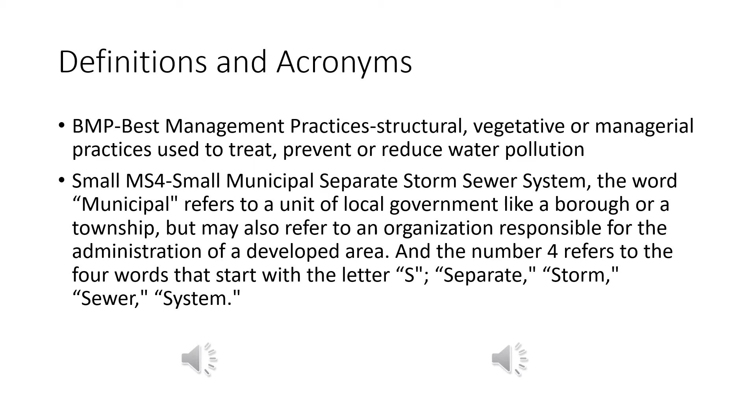SPPP, or Stormwater Pollution Prevention Plan, is the written plan required by the permit that describes how the permittee will implement each permit requirement and provides a place for record keeping and documenting when permit requirements are met.

In addition to stormwater, Atlantic Cape is authorized to discharge the following non-stormwater discharges into and from its MS4: potable water line flushing, uncontaminated groundwater, air conditioning condensate, irrigation water, flows from springs, riparian habitats, etc., sidewalk, driveway, and street wash water, flows from firefighting activities, and flows from clean water rinsing of equipment and vehicles used in the application of salt and de-icing materials.

Prior to rinsing, all equipment and vehicles shall be cleaned using dry methods, and recovered materials are to be returned to storage. Rinsing equipment is limited to exterior, undercarriage, and exposed parts and does not apply to engines or other enclosed machinery. For more specifics about non-stormwater discharges that are allowable under the permit, please refer to the permit.

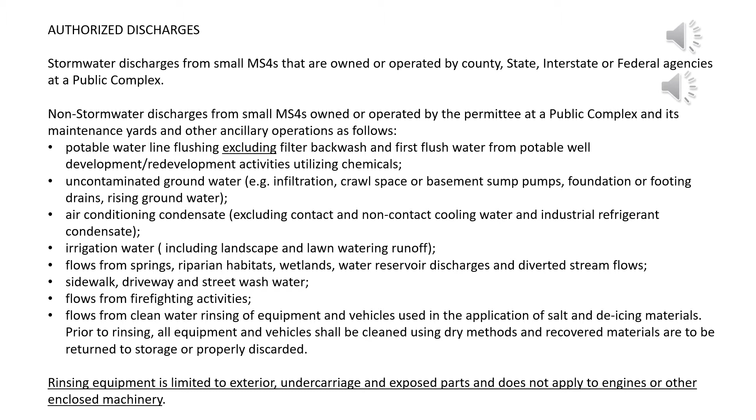Herbicide application management: the permittee shall restrict the application of any herbicide to prevent it from being washed by stormwater into the waters of the state and to prevent erosion caused by devegetation as follows. The permittee shall not apply herbicides on or adjacent to storm drain inlets, on steeply sloping ground, along curb lines, and along unobstructed shoulders, and the permittee shall only apply herbicides within a 2-foot radius around structures where overgrowth presents a safety hazard and where it is unsafe to mow.

Please note, herbicides are defined as pesticides under the New Jersey Pesticide Control Code NJAC 7:30. While the permit allows for the use of herbicides with the conditions stated above, it is not an authorization circumventing NJAC 7:30. Any pesticide application must also comply with the code.

Permittees are required to develop a stormwater management program to implement BMPs and other measures to reduce the discharge of pollutants from MS4s, maintenance yards, and other ancillary operations to the maximum extent practicable. They must also develop, update, implement, and maintain a written SPPP.

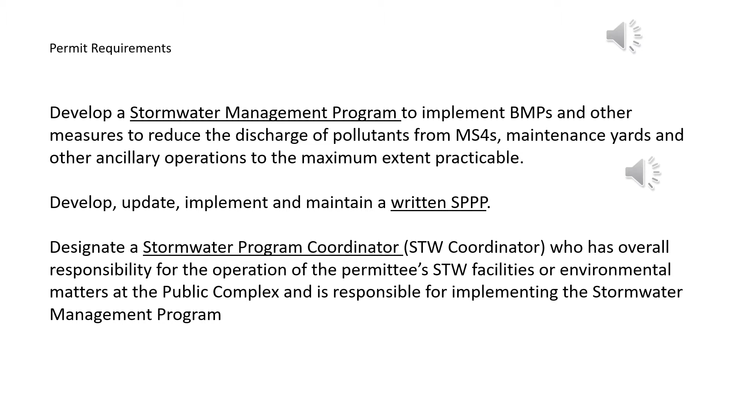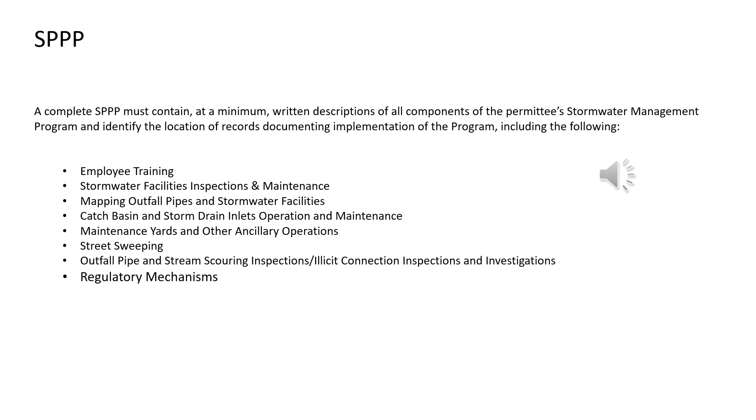The SPPP must contain written descriptions of all components of the stormwater management program. What we will be discussing specifically in our employee training are stormwater facilities inspection and maintenance, mapping outfall pipes and stormwater facilities, catch basin and storm drain inlet operation and maintenance, maintenance yards and other ancillary operations, street sweeping, outfall pipe and stream scouring inspections, and illicit connection inspections and investigations, and regulatory mechanisms.

Atlantic Cape's stormwater facilities consist of multiple catch basins and conveyances, 5 mapped outfalls, 5 infiltration, detention, and retention basins, 3 biobasins, and 2 green roofs.

A catch basin is a box that's set into the ground below grade at a low point in a property with a grate on the top and a drainage pipe that slopes away from the basin. Catch basins help maintain proper drainage and catch debris, which prevents pipes downstream from becoming clogged.

An outfall is the discharge point of a waste stream into a body of water. Detention basins temporarily store stormwater runoff. They have an outlet and are designed to manage stormwater runoff by storing it and releasing it gradually until it's drained. The permit requires that the basin drain within 72 hours.

Infiltration basins, also known as recharge basins, are designed to infiltrate stormwater through permeable soils into the groundwater aquifer. They typically do not have an outlet, do not release water except by infiltration, and should drain within 72 hours. Retention basins, by contrast, are designed to permanently hold water.

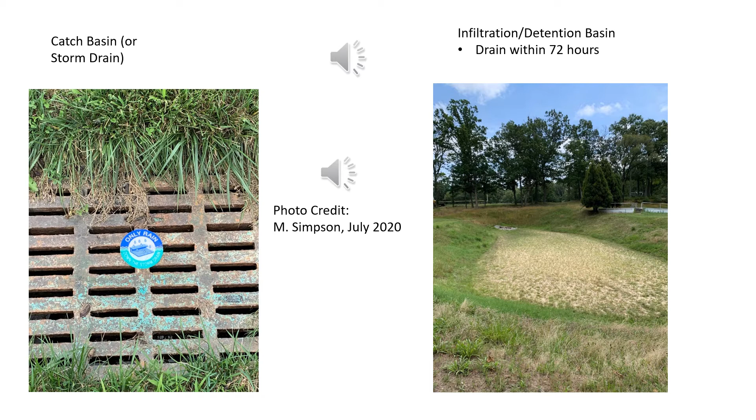This is the infiltration or detention basin by the Rutgers building at the Mays Landing campus. It's designed to drain within 72 hours. Remember, detention, dry. The basin should be dry most of the time unless it's raining.

This is the retention basin over by M building. It's designed to retain water and mimic a natural pond. It only discharges during very extreme conditions. Many times you can find frogs and turtles in these retention basins, sometimes even fish.

These are the biobasins located between the STEM building and the library. They're designed to infiltrate and recharge the aquifer. Biobasins are considered green infrastructure.

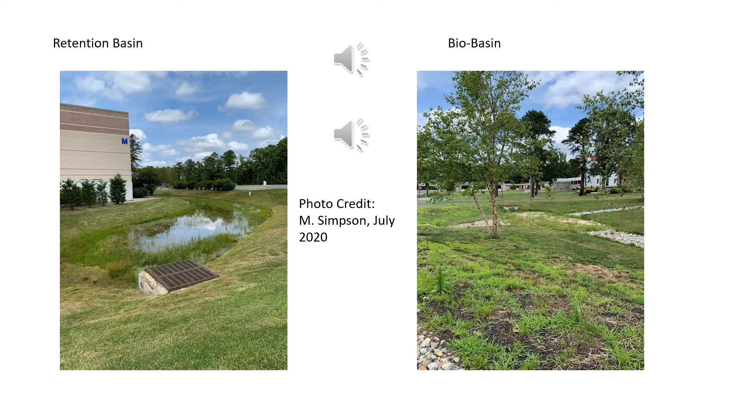We're now going to watch a video developed by NJDEP on stormwater facilities inspection and maintenance procedures.

This stormwater management training is a continuation of the material covered in Part 1. This training provides a holistic view of the maintenance work that ensures the stormwater BMPs function well. This part of the training covers 3 topics. The first, maintenance of stormwater BMPs, provides the elements of maintenance and the tools to assure the maintenance is properly performed. The second gives an example of using a checklist to inspect a BMP. The final topic provides several examples of commonly occurring maintenance issues.

Now let's talk about the maintenance work. As previously mentioned, the purpose of maintenance work is to ensure the stormwater BMPs function as designed. For example, the inlet of a basin must be clear of obstacles such as vegetation, trash, and sediment so that the runoff can freely flow into the basin and get treated.

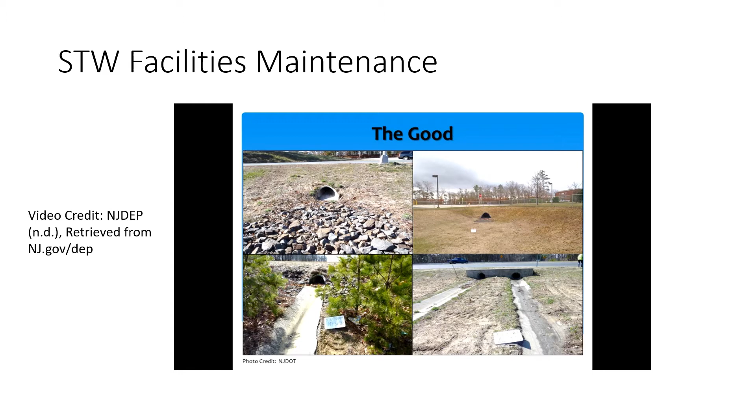These are some examples of good maintenance on the inlets of NJDOT's stormwater basins. However, it's not always sunny here in New Jersey. It has to rain sometime. Here are a few examples of inlets in bad condition. These can be easily fixed by clearing the sediment, the trash, and vegetation.

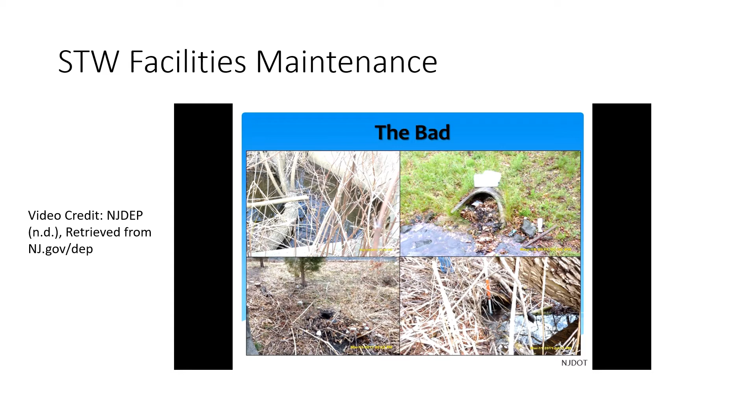However, the quick fix will not always be the best way to keep these bad conditions from reoccurring. We need a long-term, consistent way to prevent these bad situations. So, what is the best way to fix a bad situation? The fix is best remembered as MIAMI.

This acronym stands for Maintenance Plan, Inspection, Actions, Preventive Action and Corrective Action, Maintaining Records, and it is an iteration that you have to evaluate annually for the effectiveness of the maintenance plan. MIAMI is required by the stormwater management rules, under which all major development is required to have a maintenance plan for stormwater BMPs. The next slides will explain MIAMI.

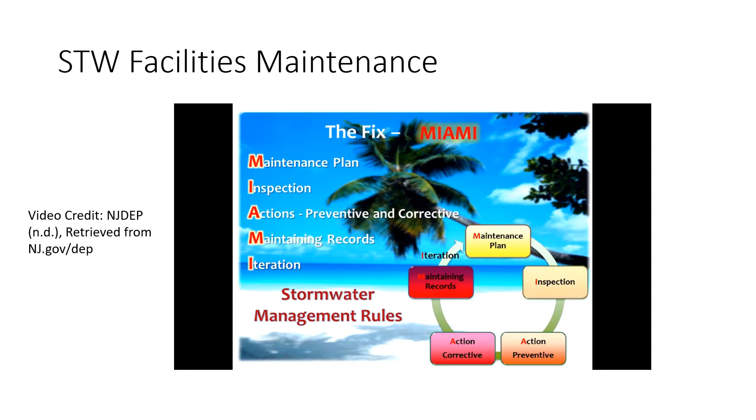The first M of MIAMI stands for Maintenance Plan. The stormwater management rules at NJAC 7:8, subchapter 5.8, and so forth, spell out the components of a maintenance plan. It is basically a planning and tracking tool containing subplans, including inventory of the stormwater BMPs, information about the stormwater BMPs, planning of preventive and corrective maintenance actions, planning of the logistics, planning of the disposal methods, planning of the costs, and education of staff for training on safety procedures and maintenance work. It can be basically grouped into 3 areas: information, planning, and education.

To make it easy to remember, you can think of it as PIE. Basically, making a maintenance plan is as easy as making a pie. First, the maintenance plan needs to have an inventory of all BMPs, including the type of BMPs, sand filter, wet pond, their location, located by GPS references or state plane coordinates, and their outfalls. Second, the maintenance plan needs to provide detailed information of each BMP present.

The detailed information includes their design information, such as the depth of the basin, the depth of the pond, the number of inlets, the size of the outlet orifices, the design detention time, the drain time, the material comprising the basin bottom, whether vegetation is required, etc.

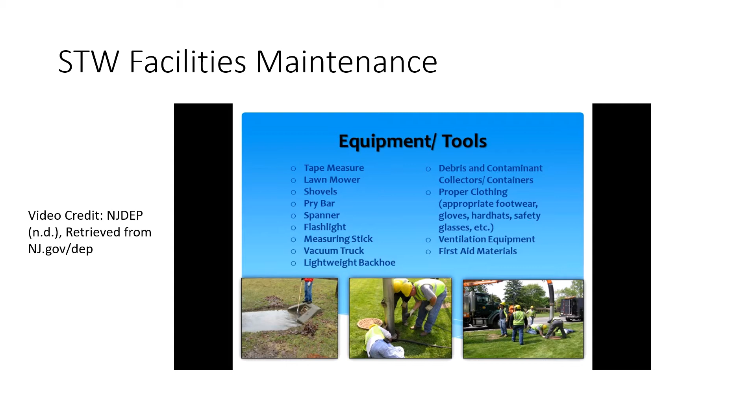Also, why do we need a lightweight backhoe? As previously mentioned, soil compaction must be avoided in infiltration basins. Therefore, when you replace sand or regrade the soil of the infiltration basin, you must use a lightweight backhoe to do the work. A maintenance plan also needs to include the disposal method and the cost.

The disposal method has to consider how to transport the removed vegetation and sediment to the disposal site. Measures may be necessary to prevent leakage of wet sediment during transport, and the site may be municipal or privately operated, or in some cases involve on-site disposal. Since permits are often required for disposal at these facilities, it is essential to plan ahead for the costs, the time, and the tasks associated with obtaining these permits.

After planning the tasks and subjects mentioned above, you will have an estimate of the costs involved, which are always required for budgeting purposes and for compliance with the stormwater management rule.

A maintenance plan shall also include a plan to educate and train staff regarding safety procedures and measures, especially the safety procedures for confined space entry. The maintenance plan shall also set up a training schedule for maintenance staff on the stormwater BMPs, maintenance work, use of tools, operation of equipment, and record keeping of performed tasks.

To recap the maintenance plan, what components are required? Basically, making a maintenance plan is as easy as remembering the word PIE, which is short for planning, information, and education. The planning part of a maintenance plan includes planning of preventive and corrective maintenance actions, planning of the logistics, planning of the disposal method, planning of the costs.

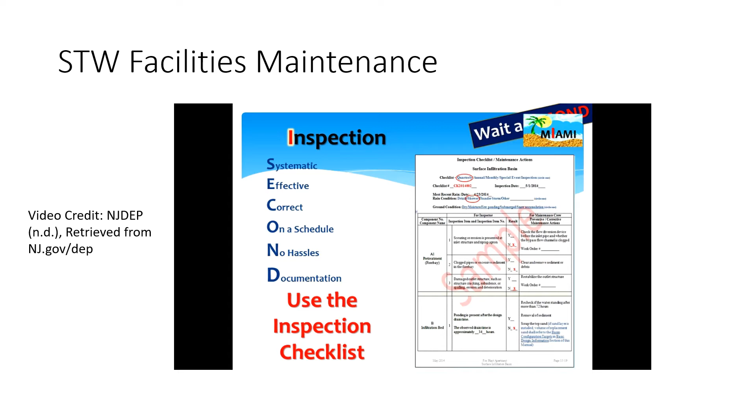After the inspection, what is the next part of maintenance? The actions. They include preventive maintenance tasks and corrective maintenance tasks. Preventive action is geared towards housekeeping done on a regular basis. The corrective actions are more likely to occur incidentally in response to the problems discovered during the inspection.

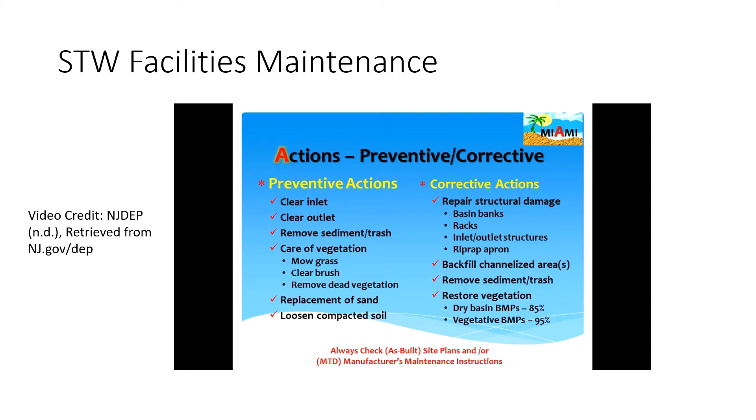Here is a list of preventive actions and also of corrective actions. It is by no means a full list. The actions could be more depending on the type of BMPs and the variation of the design. For example, the sand layer of a sand filter or infiltration basin needs to be replaced at least once every 2 years. However, if these BMPs are located in an area of having high solids loading, the designer of the BMP may request a more frequent replacement of sand.

The next part of maintenance work is to maintain good records of the inspection, the preventive actions, and the corrective actions taken to date. Keeping those records are also required by the stormwater management rules. Practically speaking, it is good to keep those records for tracking down whether or not the issues have been resolved, finding a trend, or tracking how an issue evolved, and providing as evidence the work was actually performed.

The maintenance records serve as a searchable archive of the inspections and the resulting work orders for preventive actions and repairs. Finally, the maintenance work is an ongoing, evolving process.

The stormwater management rules require that the effectiveness of the maintenance plan be evaluated annually. The maintenance plan must be adjusted according to the resulting evaluation. Maintenance personnel shall provide comments and suggestions to the manager for consideration on how to perform the work more effectively in the future. The manager shall also review the inspections and preventive and corrective records to find whether an improvement can be made.

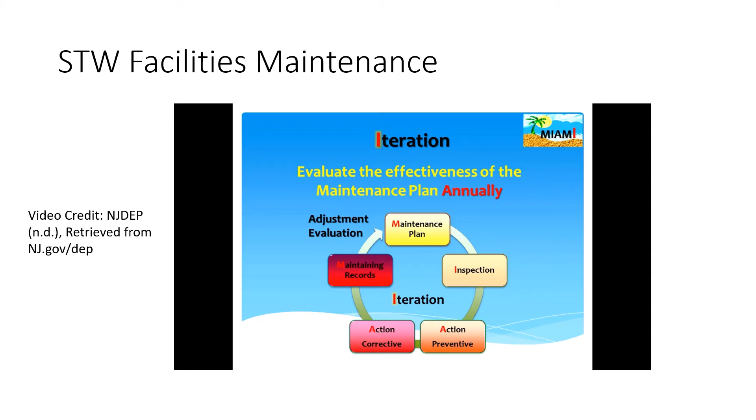Up until now, we have talked about the need for a maintenance plan to lay out the maintenance tasks. We also talked about the inspections, the preventive actions and corrective actions, and the maintenance of records. One may wonder who has to prepare the maintenance plan, who performs the inspection, and who keeps the records. So let's talk about roles and responsibilities.

Under the stormwater management rules, it is the design engineer's responsibility to prepare the maintenance plan, because he or she is the one who best understands the requirements of the BMP design. The design engineer also has the most knowledge of all of the site conditions specific to that BMP, such as the water table, the soil, and the drainage area, etc.

However, if the design engineer did not properly prepare the maintenance plan, or if the maintenance plan has been lost, the responsibility to prepare the maintenance plan may fall on the responsible party, who is typically the operator or the owner of the facility. Often a permittee will be the responsible party unless it is assigned to others.

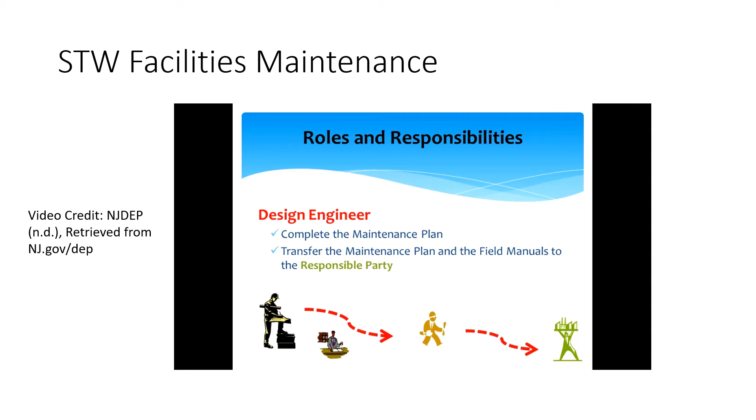The day-to-day performance of the maintenance task falls on the maintenance managers and the maintenance crew, with each having various responsibilities. For the inspector, it is a role that can be performed by people inside the responsible party. But sometimes the inspector may be from a local authority, such as township inspectors, or from state agencies like the DEP.

It is a template that the design engineer or the maintenance manager can change to meet the needs of their stormwater BMPs. The maintenance crew can take one field manual to do an inspection and record maintenance work every time they go out. They can read the information about the specific stormwater BMP they are going to inspect or work on.

They can record the inspection findings, maintenance work, or repair work performed on the checklist and keep the maintenance record in the field manual. After coming back to the office, they can hand over the field manual to the manager, who can then track down the issues and keep the inspection checklist and maintenance records in the file.

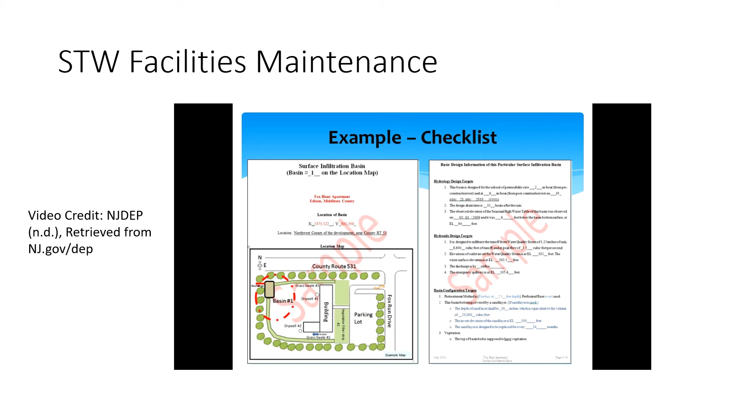Then there is the checklist for inspection. On the checklist, the inspector may record site information such as the weather, the ground condition, wet, dry, ponding present. Then the checklist includes inspection items grouped by the major component of the BMP, such as the inlet, the basin bed, the embankment, the outlet, and vegetation, etc.

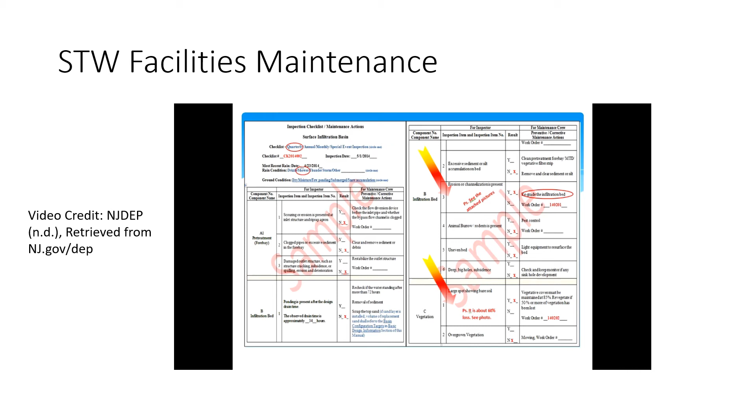It also has instructions of what conditions are determined to be normal, and the space to make comments and assign work orders for corrective actions. Then the inspector can sign off on the inspection form and include a date.

The field manual also contains the preventive maintenance record and the corrective maintenance record. The maintenance personnel can record the work performed and any issues to be followed up on. Now let's see some photos of some common maintenance issues and how to correct them.

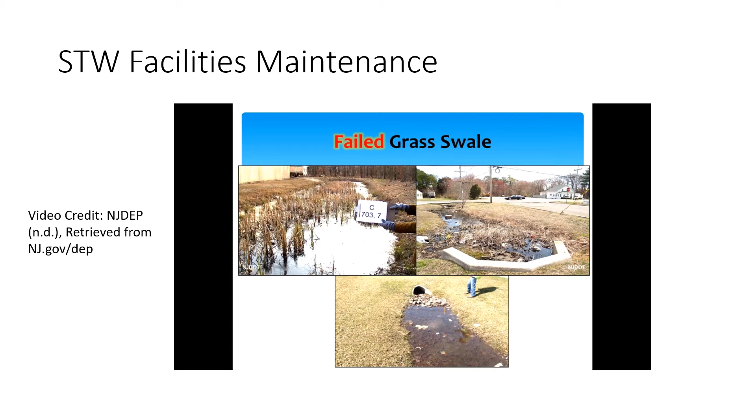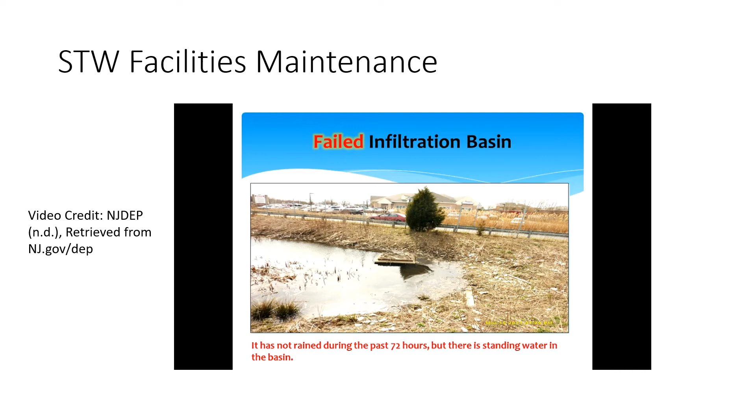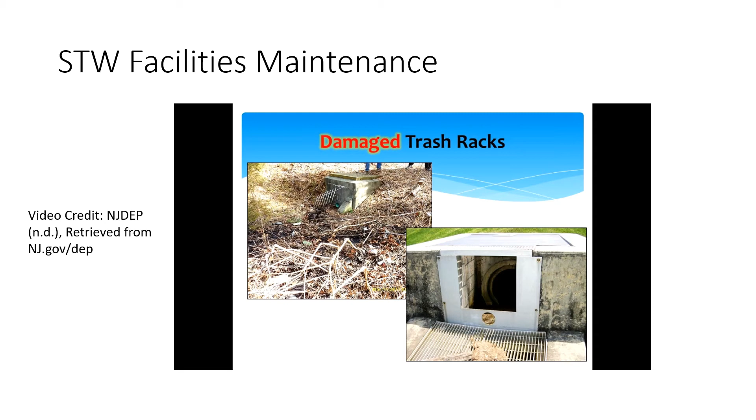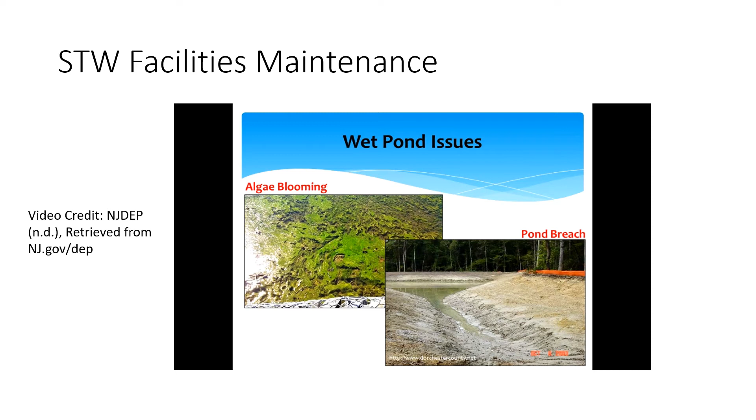Let's summarize the presentation regarding maintenance of stormwater BMPs. In Part 1, we talked about the reasons we need stormwater management and the basic functions and types of stormwater BMPs. For the basic functions, they include pollution control, flood control, and erosion control. Also included is groundwater recharge.

The types of stormwater BMPs, which we've categorized for the purpose of maintenance, include the dry basin type, the wet basin type, the vegetative type, and MTDs, which are manufactured treatment devices. In Part 2, we then talked about the required maintenance of stormwater BMPs. The Miami solution, which is the maintenance plan, inspection, action, both preventive and corrective, the maintenance of records, and the iteration of the maintenance work.

For creating a maintenance plan, it is as easy as making a pie: information about the BMPs, planning of the maintenance work, and education of the personnel.

We also gave an example of a checklist, which addressed maintenance records and the items that one would have to record about a particular BMP during a site visit. Finally, we talked about some maintenance issues and how to fix them. Thank you very much for your attention.

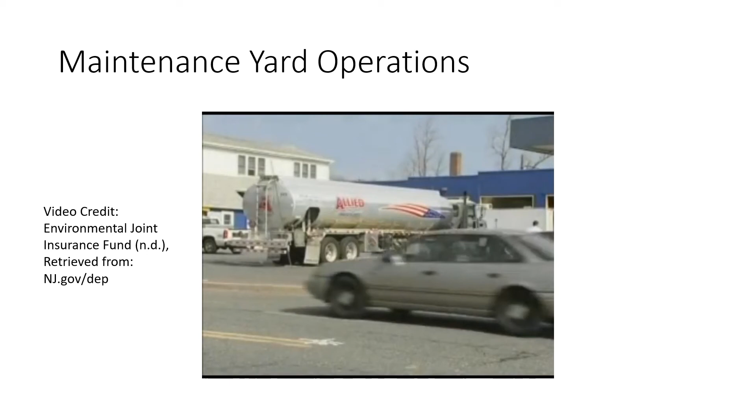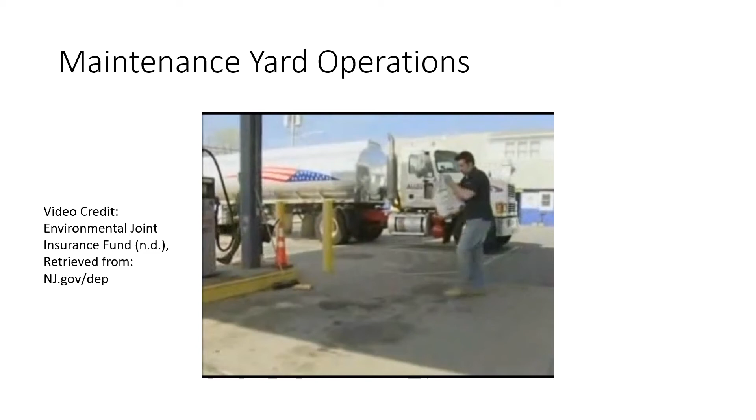Maintenance yard operations. Many of the day-to-day operations at municipal maintenance yards can contribute to stormwater pollution when these operations are not managed properly. The permit requirements for maintenance yard operations are aimed directly at the municipal public works yard and their ancillary operations. Best management practices have been designed to help improve the quality of stormwater leaving the maintenance yard. Where and how vehicle maintenance is performed, maintenance materials are stored, and motor fuels are handled can all directly impact the quality of stormwater leaving these sites and entering our water bodies.

Municipalities are required to implement standard operating procedures for the following activities: vehicle and equipment fueling and bulk deliveries, vehicle maintenance, good housekeeping, fueling operations.

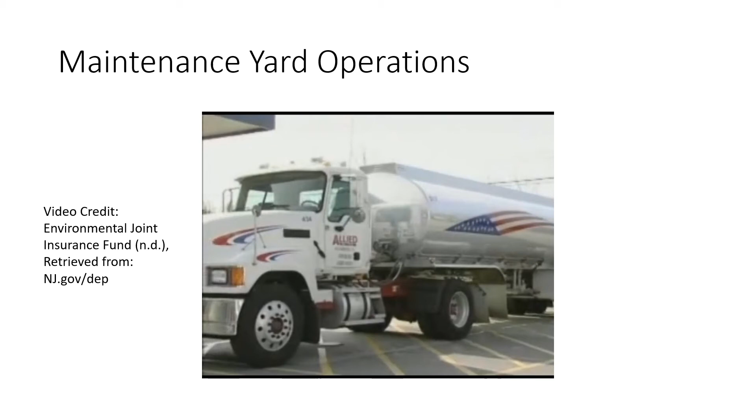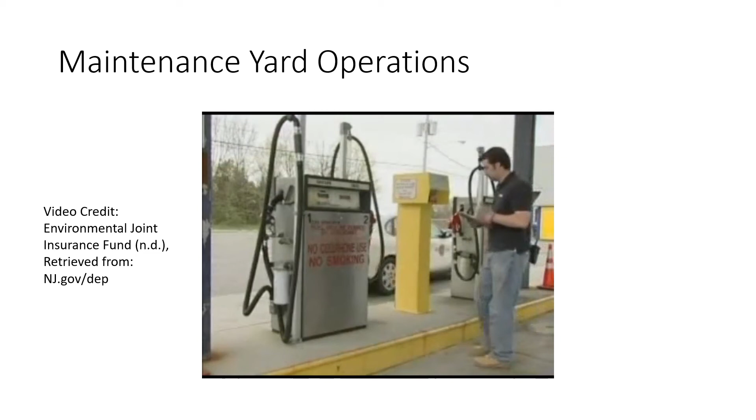Tier A municipalities are required to implement a standard operating procedure for all vehicle and equipment fueling as well as bulk fuel deliveries. All maintenance yards and ancillary operations which have gasoline, diesel, heating oil, or waste oil are applicable to this requirement. The maintenance yard and supporting facilities must be inspected regularly to ensure compliance with the municipality's fueling operations standard operating procedure. Remember to document your inspections.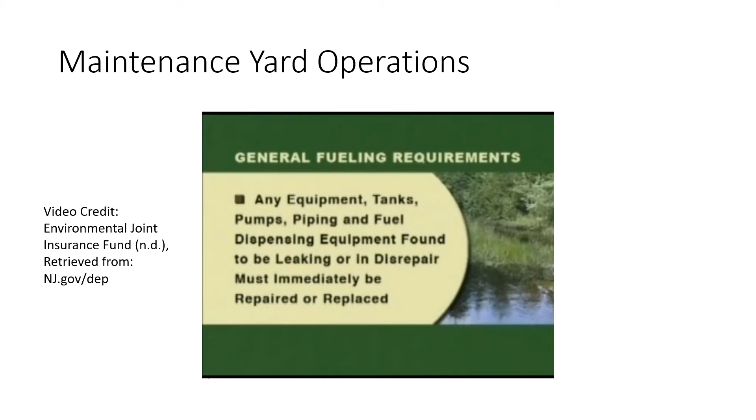General fueling requirements include no topping off vehicles, mobile fuel tanks, and storage tanks. Perform regular inspections and maintenance on all fueling equipment. Clearly post in a prominent area of the facility instructions for safe operation of fueling equipment and appropriate contact information for the persons responsible for spill response. Any equipment, tanks, pumps, piping, and fuel dispensing equipment found to be leaking or in disrepair must immediately be repaired or replaced.

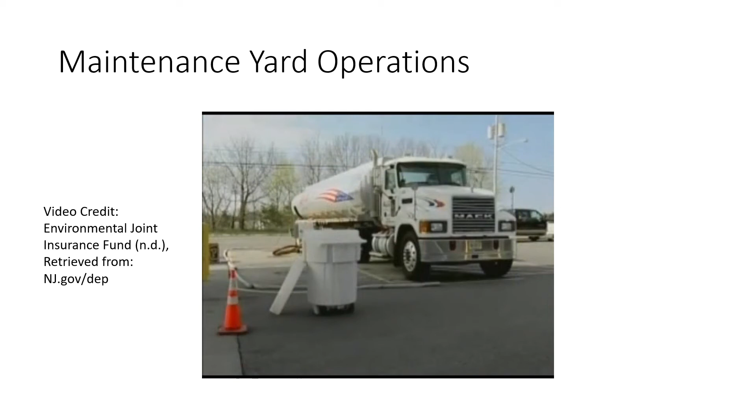Bulk fueling operations. In addition to general fueling requirements, special procedures must be implemented during all bulk product transfers. A bulk product transfer includes delivering gasoline, diesel, or heating oil to and removing waste oil from a maintenance yard or ancillary operation. A trained employee must always be present to supervise the bulk fuel transfer. Drip pans must be used under all hose and pipe connections and other leak-prone areas during bulk transfer of fuels.

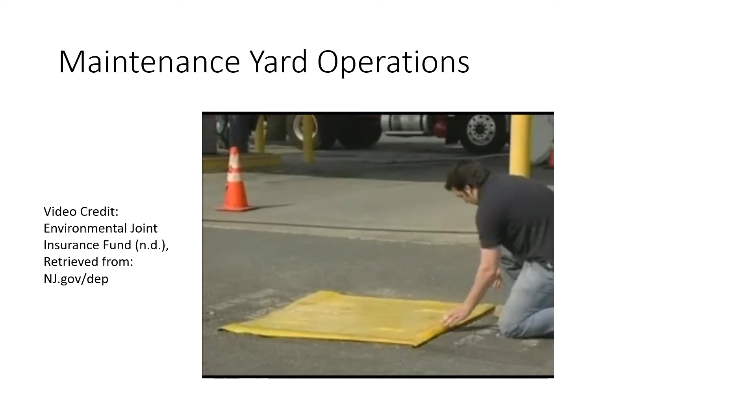Block storm sewer inlets or contain tank trucks used for bulk transfer with temporary berms or temporary absorbent booms during the transfer process. If blocking storm drain inlets will not permit the containment of a spill on site, then temporary berms or booms should be used. If temporary berms are being used instead of blocking the storm sewer inlets, all hose connection points associated with the transfer of fuel must be within the temporary berms during the loading, unloading of bulk fuels.

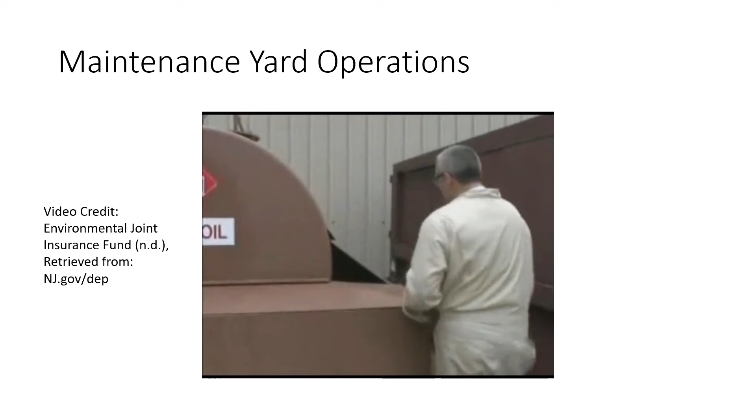Discharge of stormwater from secondary containment. Stormwater often collects in the secondary containment devices associated with many gasoline, diesel, and waste oil storage tanks. This collected stormwater may be impacted by the day-to-day drips and spills which can accumulate in the secondary containment.

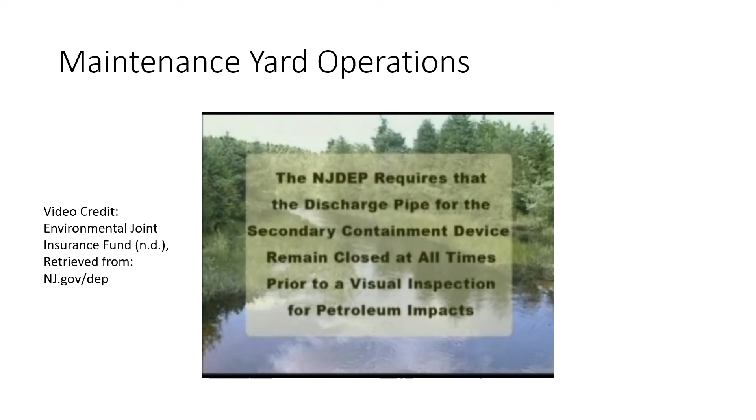Only clean rainwater which shows no visual sign of petroleum impacts can be discharged from secondary containment devices to the environment. The NJDEP requires that the discharge pipe for the secondary containment device remain closed at all times prior to a visual inspection for petroleum impacts. Inspections for sheen should be documented. For the inspection and release of stormwater from secondary containment associated with materials that may not liberate a sheen or other visual indicators of contamination, analysis of the accumulated water may be required prior to releasing to the environment.

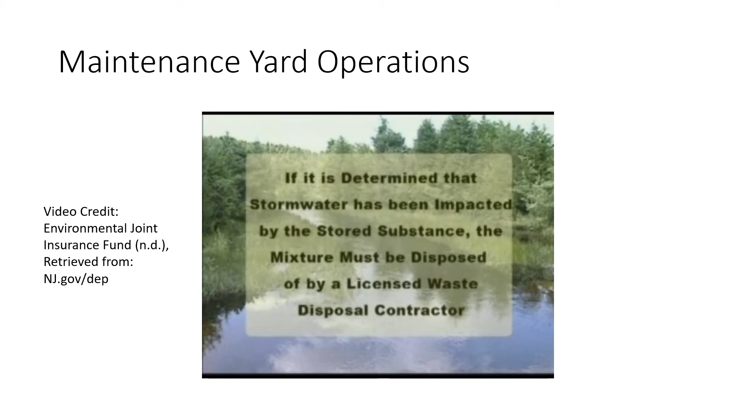If it is determined that stormwater has been impacted by the substance, the mixture must be disposed of by a licensed waste disposal contractor. Vehicle maintenance.

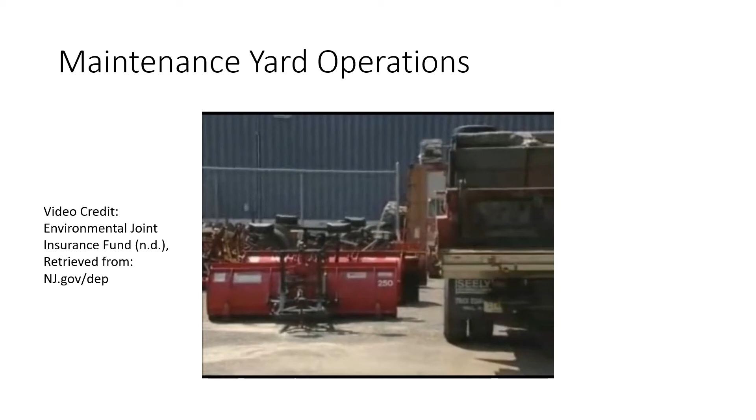Tier A municipalities are required to develop a standard operating procedure for vehicle maintenance and repair activities. The maintenance yard and supporting facilities must be inspected regularly to ensure compliance with this standard.

At a minimum, municipalities must ensure that all vehicle and equipment maintenance is performed within an indoor location on an impermeable floor whenever possible. For projects too large to be performed indoors and lasting more than a day, the equipment must be covered when not being serviced, and drip pans must be used.

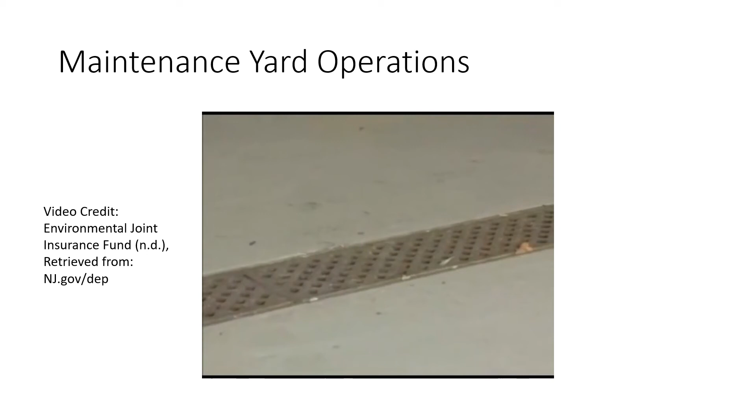Many times, floor drains are placed in mechanic maintenance areas at public works garages. It is important to confirm the discharge point of these floor drain systems. When possible, floor drain discharges should be routed to the sanitary sewer system.

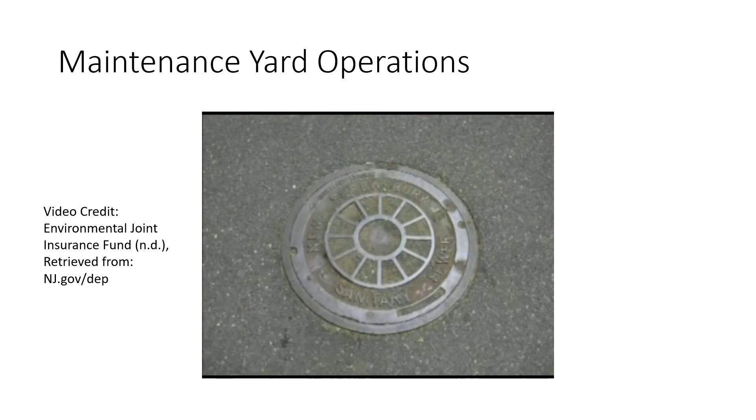Floor drain systems that discharge to the environment without a separate NJDEP permit, even if treated through an oil-water separator, are considered illicit connections and must be eliminated within 6 months of discovery, in accordance with the requirements of the municipality's Illicit Connection Elimination Program.

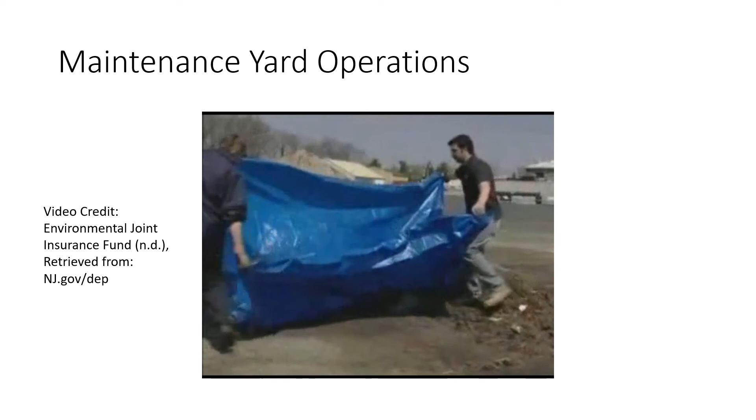Good housekeeping. Tier A municipalities must identify all sources of potential stormwater pollution at their DPW yards and implement procedures to reduce the exposure of these materials to stormwater.

An inventory of all general categories of source material present at the maintenance yard and all ancillary operations must be included in the municipality's stormwater pollution prevention plan.

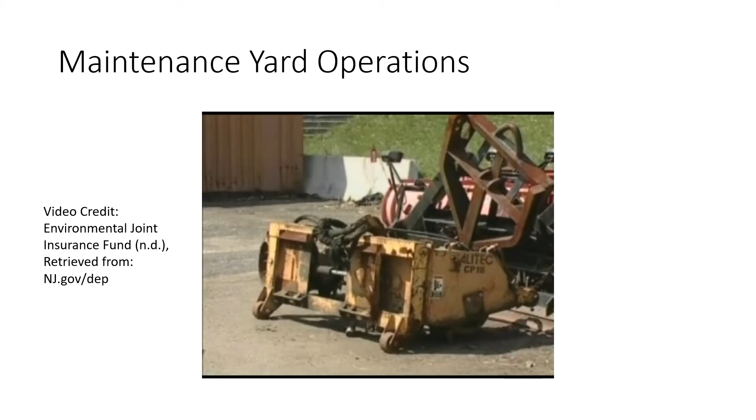Source materials include, but are not limited to, construction materials, used parts and tires, rimmed or unrimmed, equipment and fuels, hydraulic equipment such as snowplows, oils and greases, solvents and detergents, fueling areas.

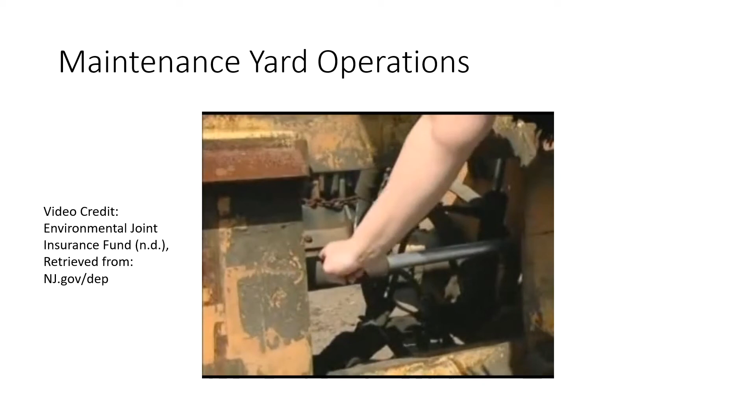A rule of thumb for determining if materials such as equipment and parts can impact stormwater is to simply wipe the surface. If residual material transfers to the cloth or your finger, it is likely that the material will be removed by precipitation.

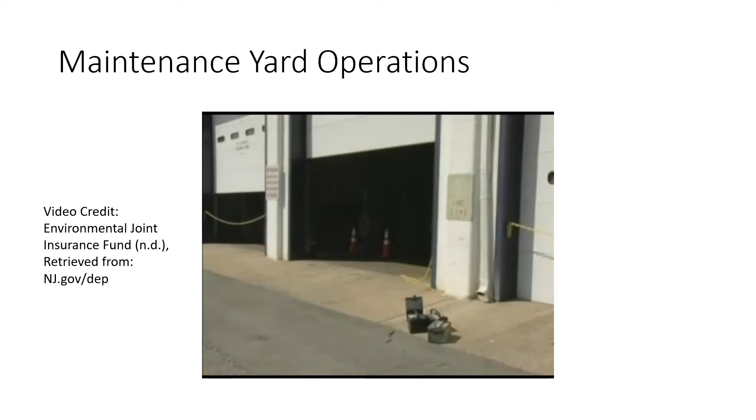Municipalities should conduct regular inspections for any potential source material present at the maintenance yard or ancillary operations. These documented inspections should include what steps were taken to remove, cover, or eliminate the source material in question.

Good housekeeping practices must include the following activities. Container management: properly mark or label all containers. Labels must be kept clean and visible. All containers must be kept in good condition and tightly closed when not in use.

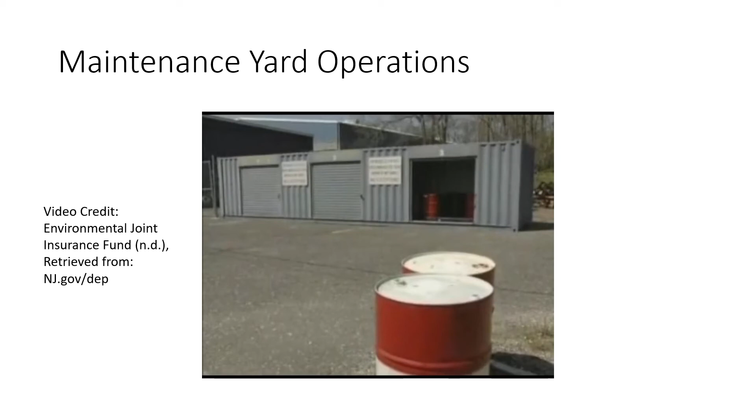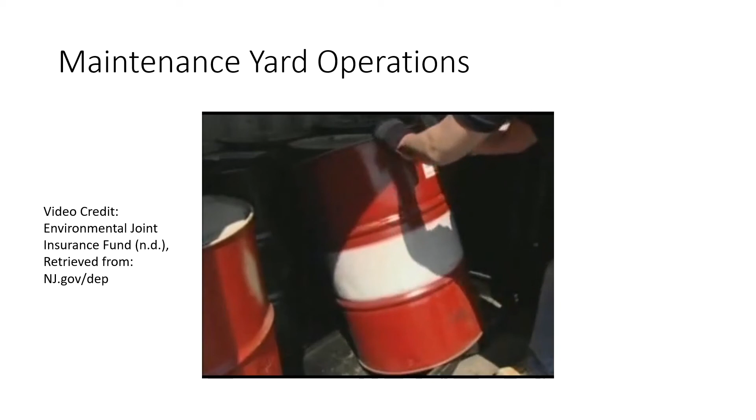When practical, containers must be stored indoors. Containers may be stored outside as long as they are covered and placed on spill platforms. Empty drums must be closed to prevent stormwater infiltration and wiped clean of all residual on the exterior.

Spill cleanups: conduct cleanups of any spills immediately after discovery. Clean all maintenance areas with dry cleaning methods only. Spills shall be cleaned up with a dry, absorbent material, such as kitty litter, sawdust, etc.

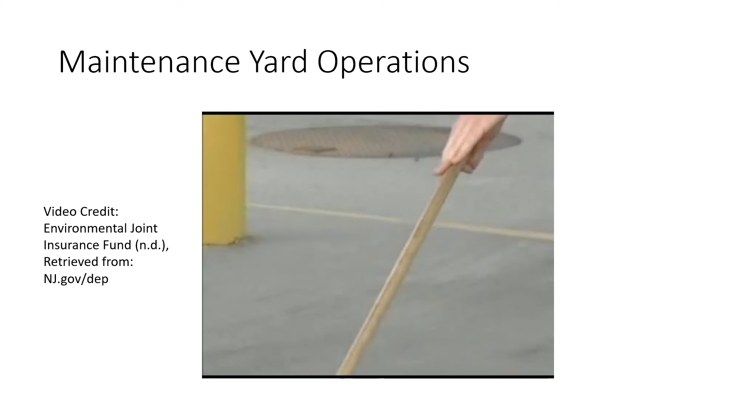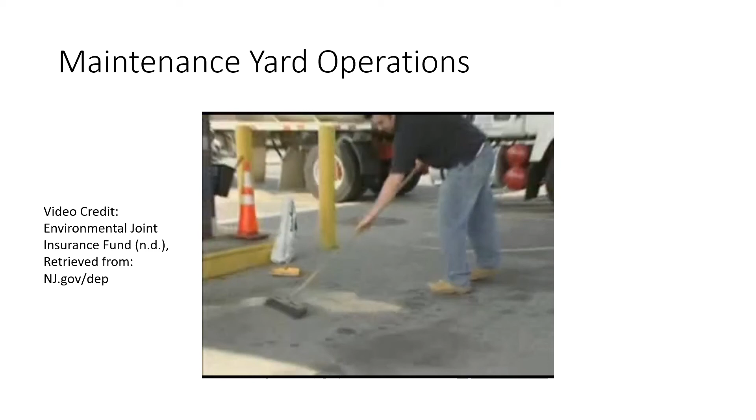This material should be swept into the area and removed immediately. Leaving this material on the spill site will allow stormwater to carry it into the environment. Collected waste is to be disposed of properly. Cleanup materials, spill kits, and drip pans must be kept near any liquid transfer areas, protected from rainfall.

Equipment and vehicle washing: the uncontrolled washing of municipal vehicles and equipment has the potential to deliver large amounts of oils, greases, and solids to receiving water bodies.

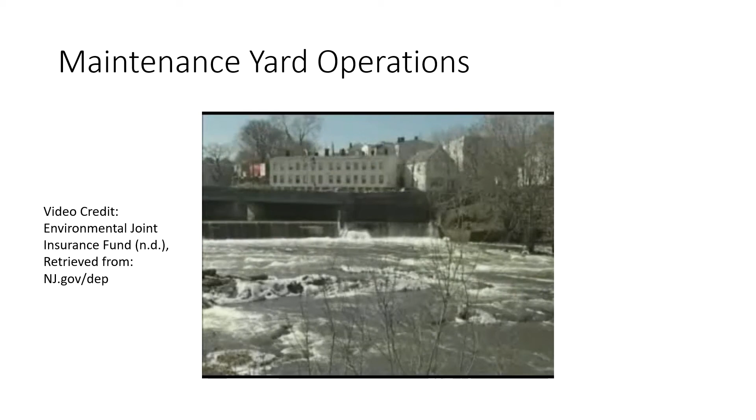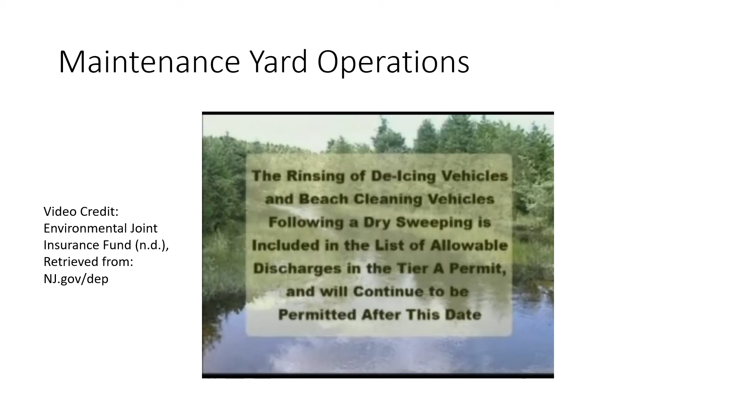The Tier A stormwater permit allows wash waters from vehicle and equipment washing to discharge to the environment until February 28, 2009. The rinsing of de-icing vehicles and beach cleaning vehicles following a dry sweeping is included in the list of allowable discharges in the Tier A permit and will continue to be permitted after this date.

Municipalities should consider utilizing commercial washing facilities, installing a vehicle wash system, or using regional vehicle washing facilities following the 2009 permit modification. Residential car washing is allowed. However, we should urge our residents to use commercial car wash facilities whenever possible.

De-icing materials storage. Each winter, thousands of tons of salt and other materials are used on roadways all over the state of New Jersey. Many municipalities store large volumes of salt and sand at their maintenance yard for use on municipal roads.

The safety benefit from the use of these materials outweighs its impact. However, municipalities must minimize the exposure of material while stored on site.

Significant environmental damage can occur if large amounts of de-icing material are allowed to impact a single water body near these bulk storage locations. Groundwater, surface water, and local wildlife can all be negatively impacted by large amounts of salt entering the environment.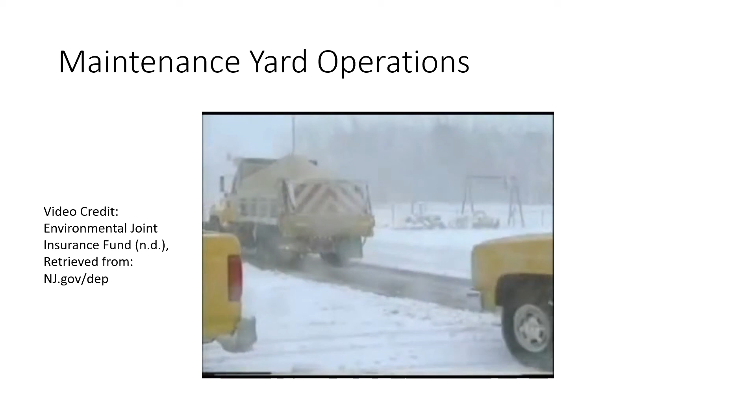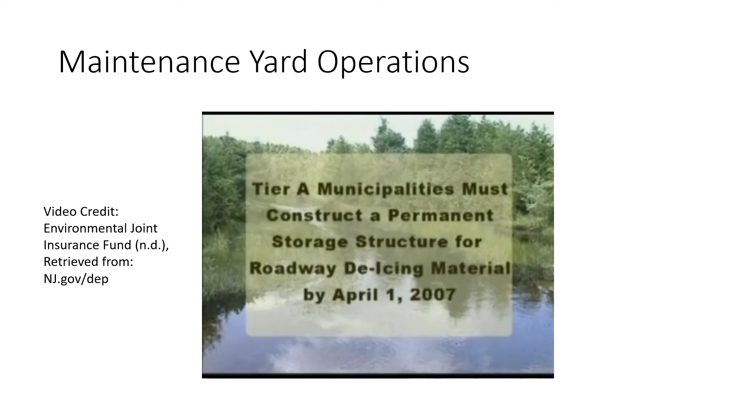Tier A municipalities must construct a permanent storage structure for roadway de-icing materials by April 1, 2007. In the interim, seasonal tarping of de-icing materials is an acceptable practice from October 15th to April 30th. The material must remain covered at all times when not actively being used.

Clean sand does not need to be kept covered, but must be stored 50 feet from any storm sewer inlet, stormwater conveyance channel, or water body.

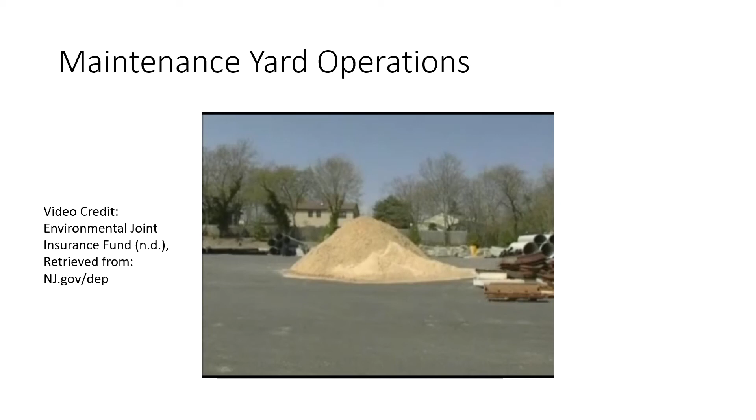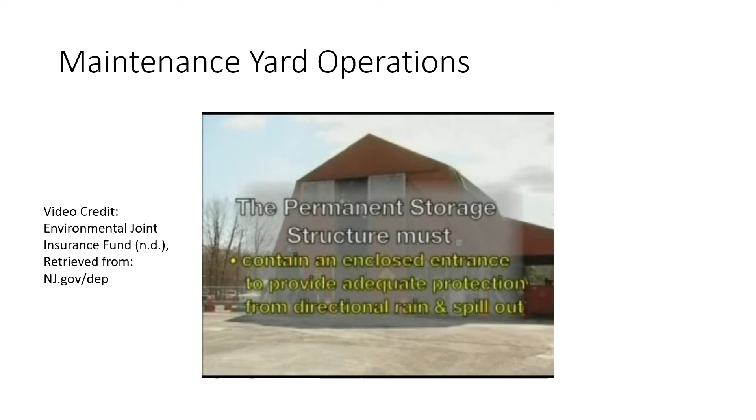The permanent storage structure must be fully roofed, walled, and anchored to a permanent foundation with an impermeable floor. Structures must also contain an enclosed entrance to provide adequate protection from directional rain and spill out. The structure should prevent stormwater from impacting the stored materials.

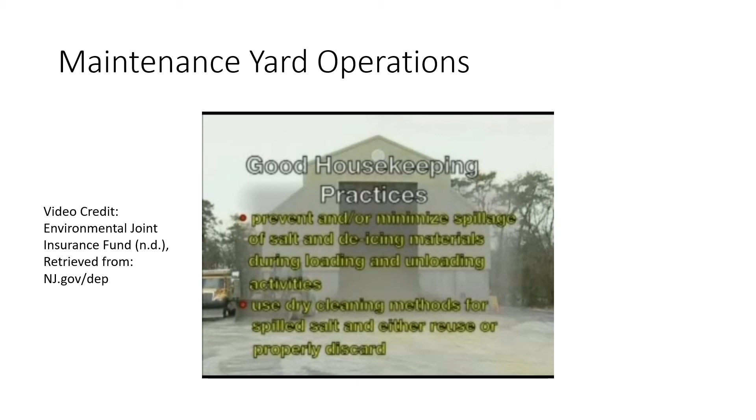Required good housekeeping practices for de-icing material handling have been detailed in the Tier A stormwater permit. Prevent and/or minimize the spillage of salt and de-icing materials during loading and unloading activities. Use dry cleaning methods for spilled salt and either reuse or properly discard.

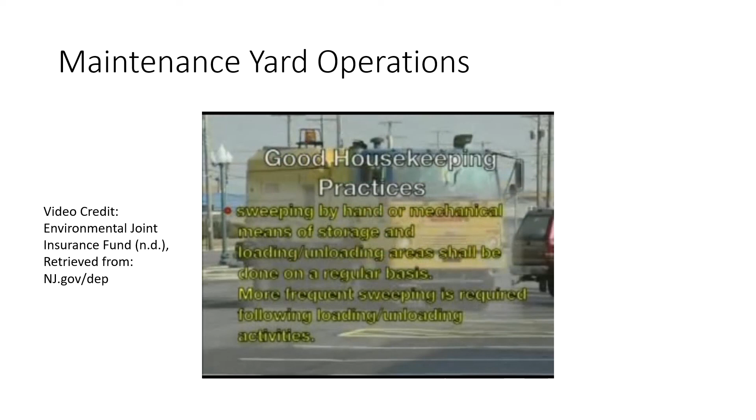Sweeping by hand or mechanical means of storage and loading, unloading areas shall be done on a regular basis. More frequent sweeping is required following loading and unloading activities, and shall also be conducted immediately following, as practicable, those activities.

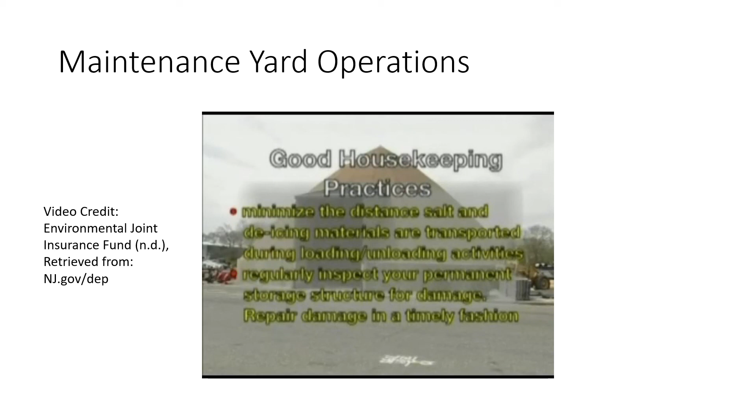Tracking of materials from storage and loading, unloading areas shall be minimized. Minimize the distance salt and de-icing materials are transported during loading, unloading activities. Regularly inspect your permanent storage structure for damage, and repair damage in a timely fashion.

There are just a few items to remember that are specific to Atlantic Cape's Stormwater Pollution Prevention Plan. Vehicle washing must only be conducted at a commercial car wash station unless the wash water is collected and managed as wastewater. Nothing other than sanitary wastewater can be discharged into the I-building septic system.

All catch basin refuse stored on site should be covered from precipitation and kept on an impervious surface until it is disposed of by a licensed solid waste transporter at a facility properly permitted to accept solid waste. Water leaching from catch basin refuse should be managed as wastewater and should be disposed of into the sanitary sewer or through a licensed wastewater disposal contractor.

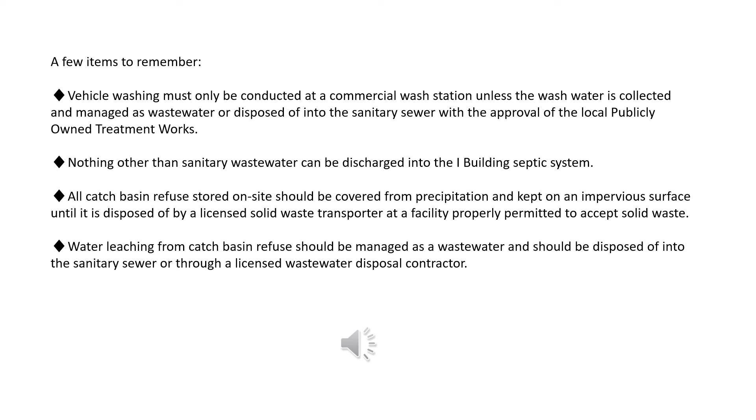Again, to reiterate, clean water rinsing of equipment and vehicles used in the application of salt and de-icing materials is allowed. Prior to rinsing, all equipment and vehicles shall be cleaned using dry methods, and recovered materials are to be returned to storage. Rinsing equipment is limited to exterior, undercarriage, and exposed parts and does not apply to engines or other enclosed machinery.

Conduct cleanup of any petroleum or chemical spills immediately after discovery and by using dry cleanup methods only. All contaminated spill cleanup materials will be disposed of in accordance with Atlantic Cape's Hazardous Waste Management Plan. Any spill should be reported to your supervisor and security immediately, who will contact NJDEP or US EPA as appropriate.

Call 911 first in the event of injuries, fire, or explosion. If a person is in immediate need of medical care, call 911, then security. If you come upon an unconscious person, do not attempt to rescue the person or administer care if you are unsure if it is safe to enter the area.

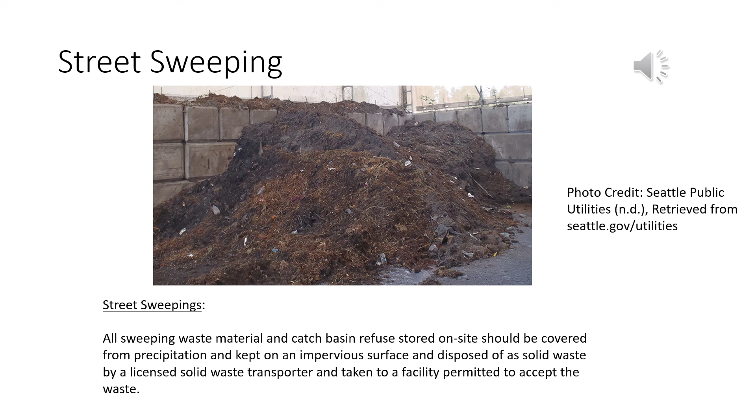The permit requires that Atlantic Cape develop an outfall pipe inspection program. This permit condition has three components: outfall pipe mapping, illicit discharge detection, and stream scouring detection and control.

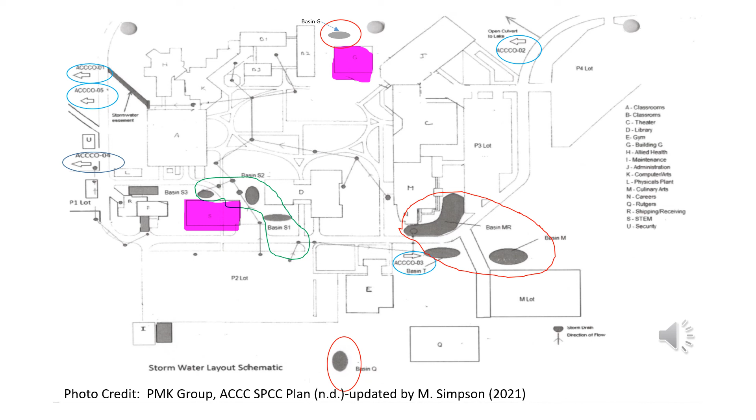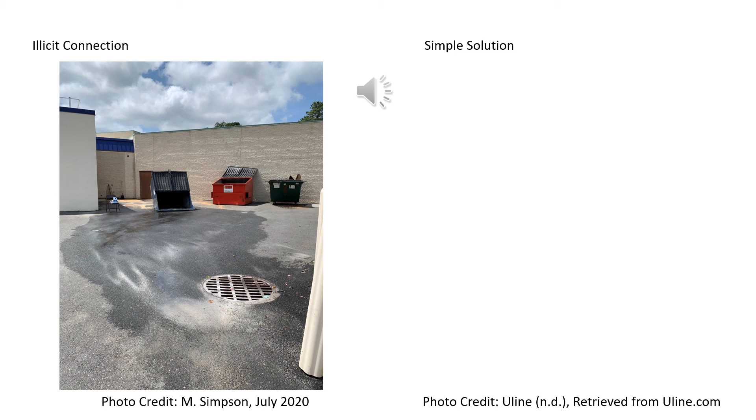Here's an example of an illicit connection that occurred at our own campus.

Outfall pipe stream scouring is the localized erosion of the stream bank or bottom caused by the discharge from the outfall pipe and can have a negative effect on fish and other aquatic life living in the stream. If scouring is noted, one way to eliminate it is to retrofit stormwater facilities to slow the discharge of stormwater through the outfall.

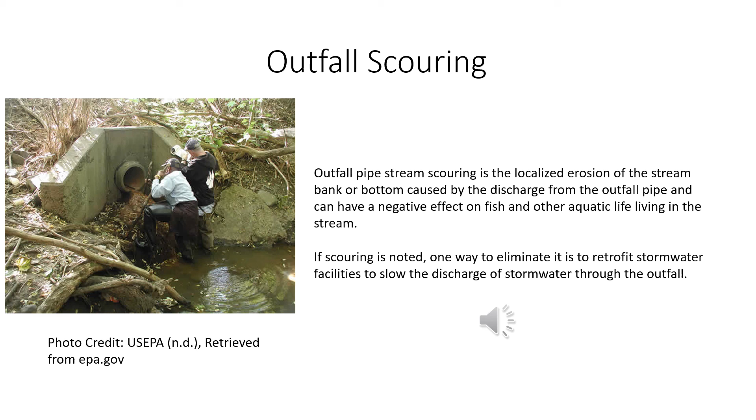The permit requires permittees to develop regulatory mechanisms to address violations of the Stormwater Pollution Prevention Plan.

The regulatory mechanisms must address pet waste control, litter control, wildlife feeding, prohibiting illicit connections, and improper waste disposal.

You can find Atlantic Cape's regulatory mechanisms at our website under Policies and Procedures.